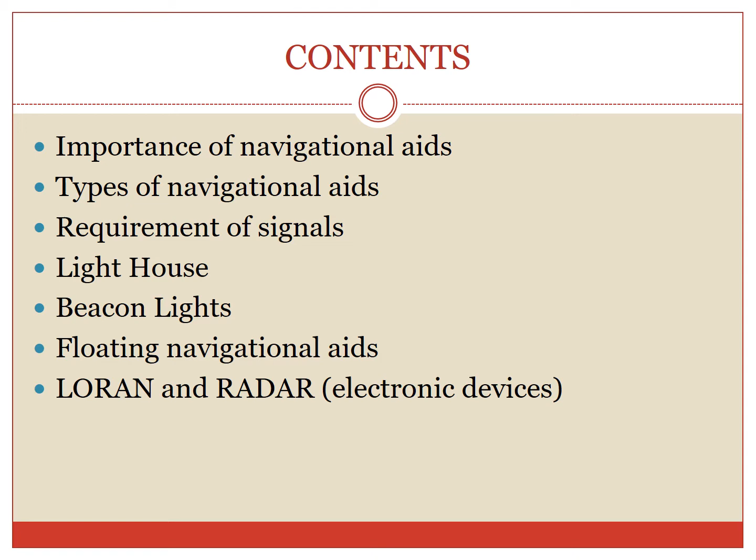So moving across to the importance of the navigational aids. For safe, efficient, economic and comfortable travel of vessels in rivers, channels, harbors and along lake and ocean shores, navigation aids are necessary. Similar to the facilities provided in airports for safe landing and takeoff, in ship traffic also certain aids are very necessary. These are called navigation aids. They are provided in the rivers, entrance channels, harbors and also along the lakes and the seashores.

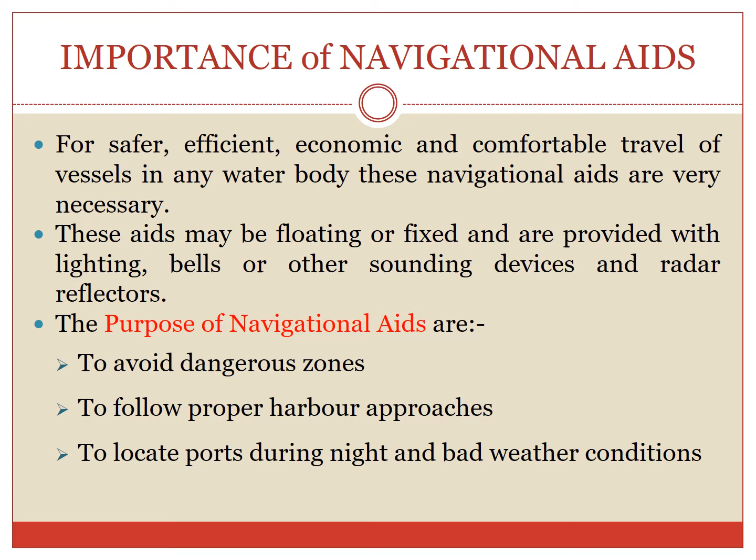These navigation aids may be of the fixed type or the floating type and provided with lighting, bells or other sounding devices and radar reflectors. There are many purposes of these navigational aids. Some are listed below. To avoid dangerous zones like rocky outcrops and sandbars. To follow proper harbor approaches. And to locate the ports, especially during night and bad weather conditions resulting in poor visibility due to fog or clouds. So my dear friends, navigational aids are truly very important to every ship.

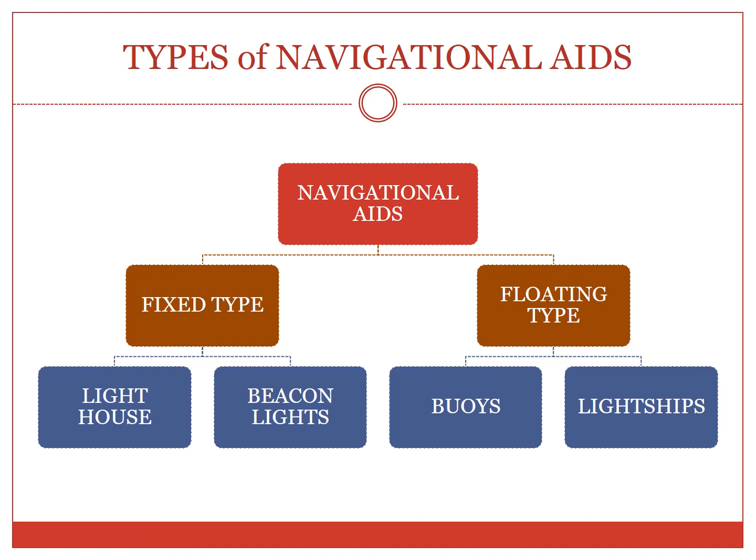Next we come to the types of navigational aids. The types are the fixed type and the floating type. In the fixed type we have two, the lighthouse and the beacon lights, and in the floating type we have the buoys and the lightships.

Every lighthouse or every navigational aid of the fixed type comes with signals. Now, what are the basic requirements of signals? The basic requirements of signals are that they compel attention. They permit time for easy response. They make their meaning clear at a glance. They command respect. And lastly, the visible distance, their visibility.

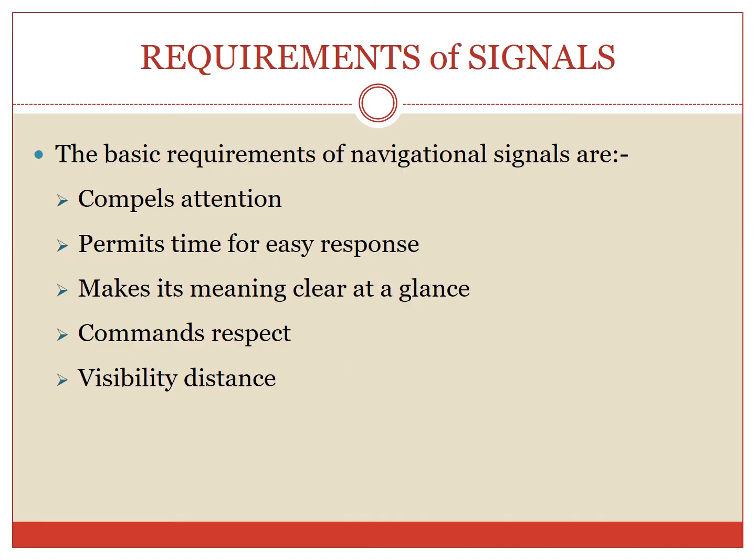Now, lighthouses. These are tall tower structures built of masonry or reinforced concrete. A marine beacon light lantern is provided on the top of this tower. A tower is divided into a number of floors. The lower floors are used as the service, stores and living rooms for the maintenance and working of the lighthouse. The towers are erected on points along the shore to guide the vessels to a nearby port. These lighthouses are also constructed on reefs, shoals or other points of danger to vessels.

The tower floors are accessible by a flight of winding stairs from bottom to top. The tower should be strong enough to withstand heavy wave action. The foundation for the tower depends upon the characteristics of the soil of that area. Generally, a thick bed of concrete is provided on hard soil and rocky beds. In the case of marshy locations, pile foundations or caissons may be used. The basement for the tower is made up of stone or concrete blocks. These stones and concrete blocks are joggled both vertically and horizontally. This secures and binds the blocks together.

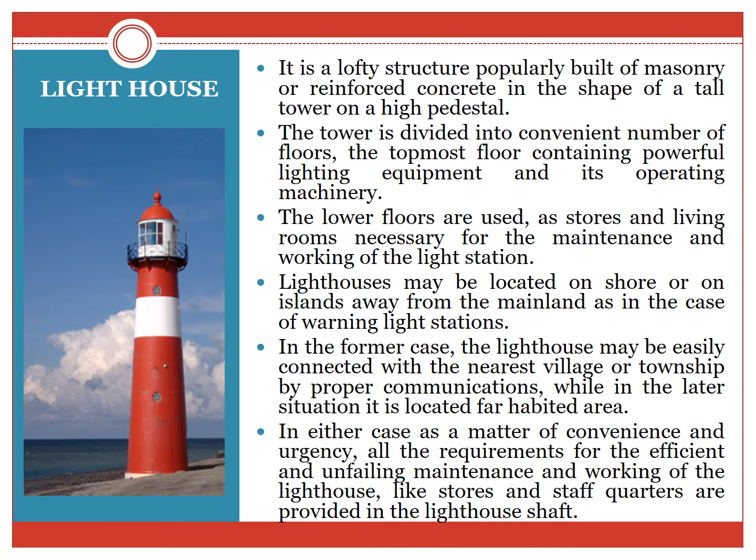The lighthouse tower must be high enough to account for the earth's curvature, so that the beacon light may be sighted by approaching ships at a considerable distance offshore. Usually, it must attain a visibility of at least 30 kilometers from the lighthouse. Also, the lights should not be located so high as to be obscured by clouds, mists, and many other things. In either case, as a matter of convenience and urgency, all the requirements for the efficient and unfailing maintenance and working of the lighthouse, like stores and staff quarters, are also provided in the lighthouse shaft.

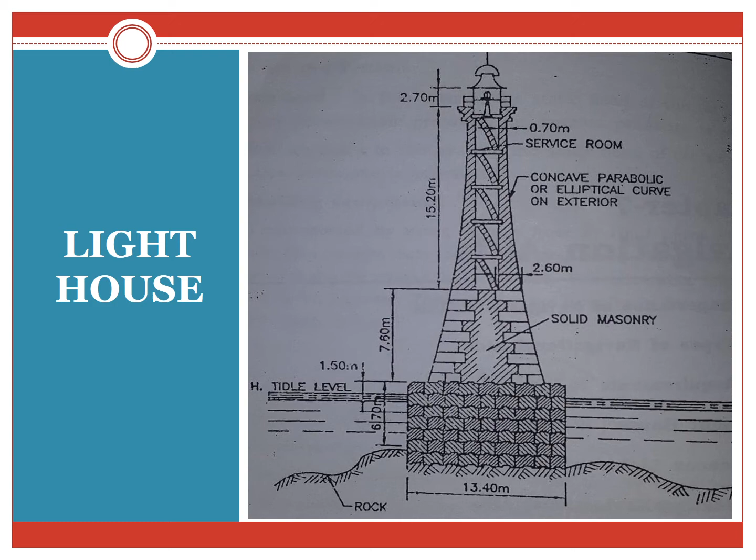So, my dear friends, this is a typical diagram of a lighthouse. See how the bed of the lighthouse is made up of concrete blocks. The masonry above is solid masonry, and the uppermost part may be of steel structure or of concrete work. The bottommost part is the foundation. The uppermost part is known as the service room, where the light is provided.

Now moving across to the beacon lights. These are fixed or flashing for easy identification by the navigator. They are used as a means of alignment or indicating changes of direction. Prominent objects or landmarks, natural topographical features or structures are used as beacons.

Alternatively, a beacon could be built in a form of an open tapering framework with a wide stable base and gradually narrowed to the top, like a triangle or a circle. The distinctive geometrical figure is suitably painted so as to cause the prominence.

The illumination is both refracted through the powerful lenses and prisms and reflected by highly polished parabolic concave mirrors. Now, the fixed lights should be avoided to get rid of confusion caused by the neighborhood private lights. Depending upon the focal distance of the lens, the lights are classified as the first order lights, the second order lights, and miscellaneous smaller lights.

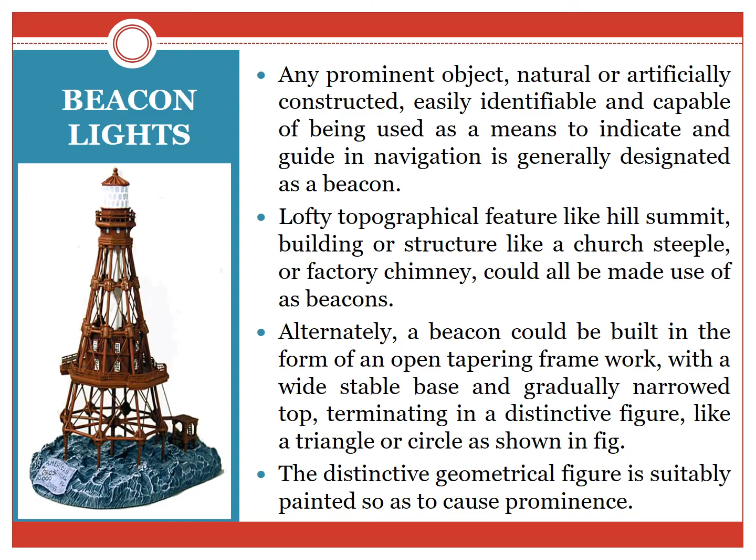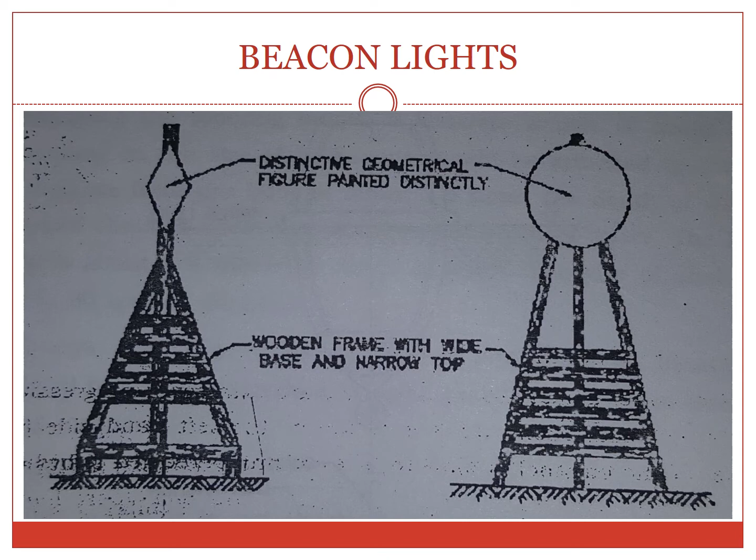Thus, alternatively, a beacon can be built in a form of an open tapering framework. The distinctive geometrical figure is suitably painted so as to cause the prominence. So, these are the two types of beacons where the base is wider and at the top it is like a triangle or a circle. These are the distinctive figures painted distinctively.

Moving across to the floating navigational aids, first we move across to the buoys. What are buoys? These are small sized floating structures generally in a form of large cylindrical cans and drums. They are provided with through stays. They are employed for demarcations at entrances, approach channel boundaries, and so on. Two rows of buoys, one along each boundary of the approach channel, indicate its width.

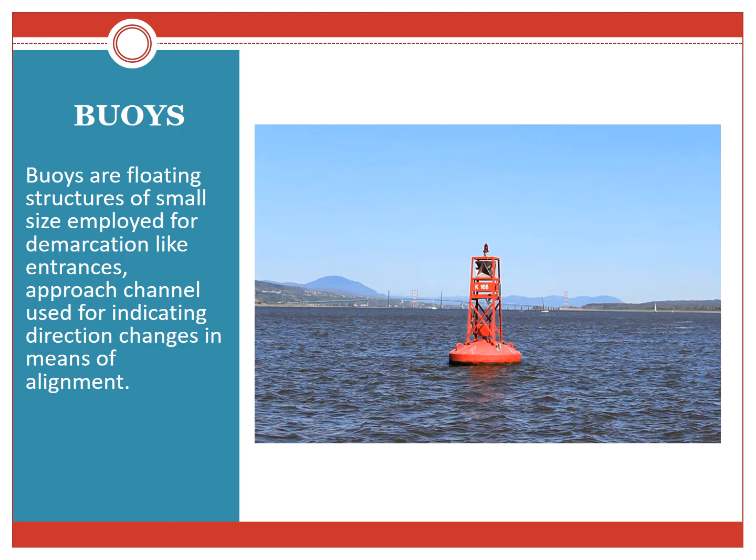Buoys are of different types: channel and entrance demarcation buoys, luminous buoys, audible buoys or bell buoys, and mooring buoys. So these are the four types. What are luminous buoys? These are the signals that are to be provided at places likely to be seriously affected by fogs. During the night, the buoys are to be lighted. For lighting the buoys, oil gas or acetylene are used. The fuel is stored in the buoy itself.

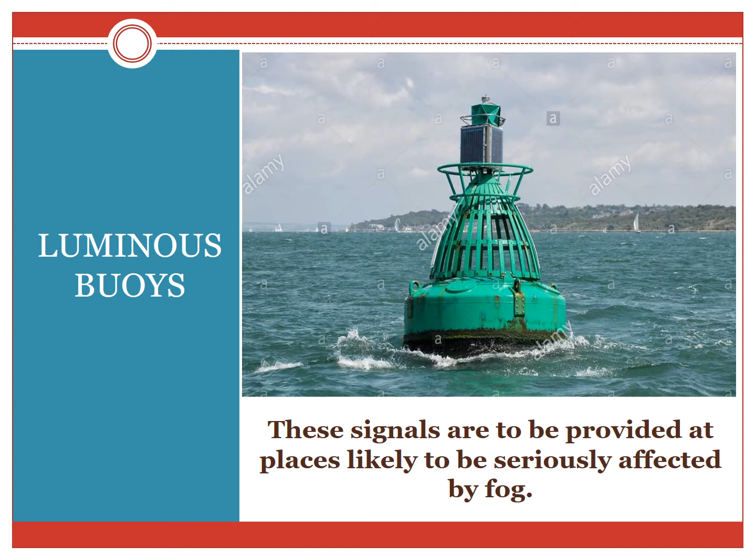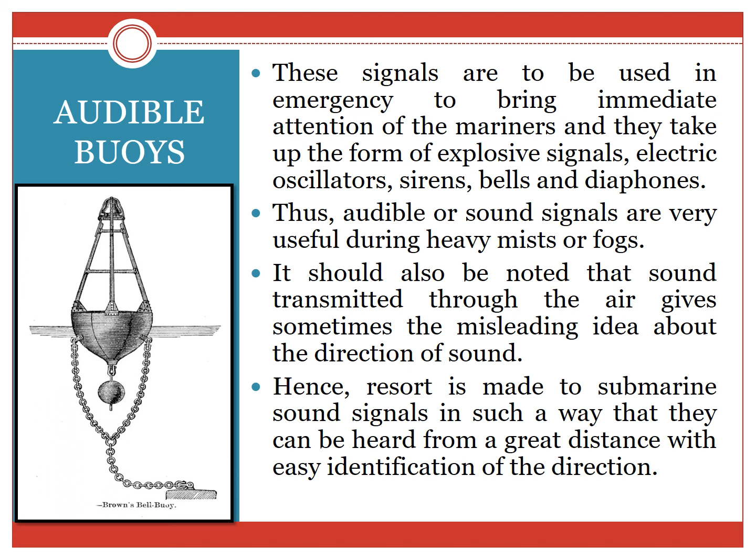Next we move across to the audible buoys. For indicating foggy weather, audible buoys or bell buoys are used. Bells are mounted on these buoys which will be sounded in quick successions at intervals of not more than a minute. In these buoys, an automatic arrangement is made for a hammer to strike against the rim of the bell fixed in this particular buoy.

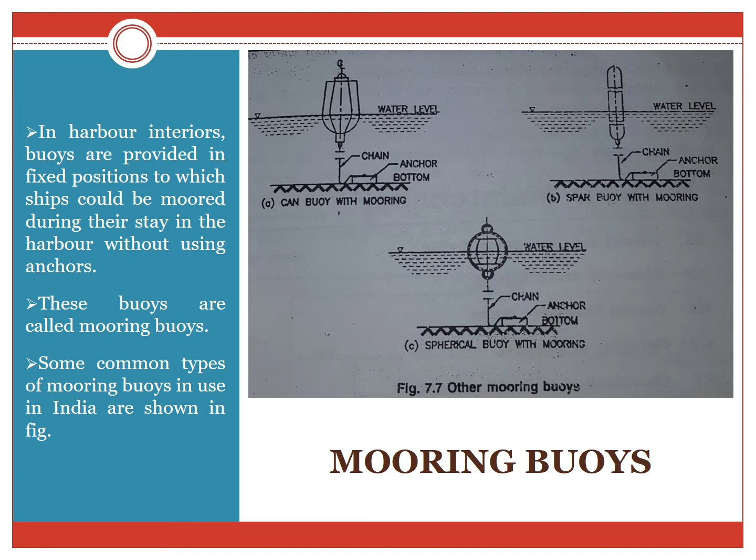Next, the mooring buoys. There are three types of these buoys: can buoys with mooring, spar buoys with mooring, and spherical buoys with mooring. So in harbor interiors, buoys are provided in fixed positions to which ships could be moored during their stay in the harbor without using anchors. These buoys are known as mooring buoys. Some of the common types, as we have already discussed, can be these three.

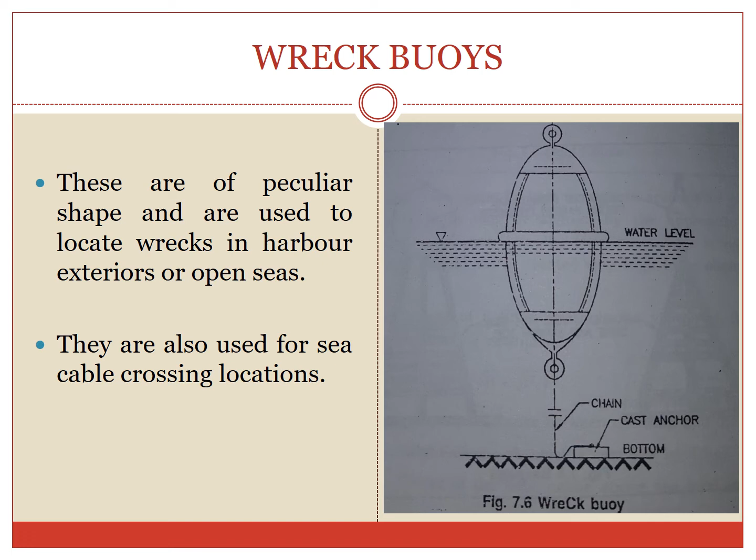Next and the last buoy is the wreck buoy. Now what are wreck buoys? These are of peculiar shape and are used to locate the wrecks in the harbor exterior or open seas. They are also used for sea cable crossing locations. See the figure of the wreck buoy; it shows that it has a bottom, the cast anchor, the chain and the buoy itself above the water level and below the water surface.

Lightships. Now in locations where it is not practical to build a lighthouse, small ships displacing about 500 tons are used for this purpose. These lightships vary in size. They can be fully manned or unmanned ones with automatic lights and fog signals. Now the lantern is generally situated at about 9 to 12 meter height above the water level. The light apparatus comprises 4 pairs of mirror reflectors placed around the light and made to revolve at a suitable speed, emitting a predetermined number of flashes.

Now the hulls of the lightships are generally painted red in color. The name of the station is painted in white on both the sides of the lightships. The lightship propulsion is either steam powered or diesel. So the light apparatus consists of the 4 pairs of mirror reflectors and they are made to revolve at a suitable speed, emitting a predetermined number of flashes. These are, my friends, the lightships.

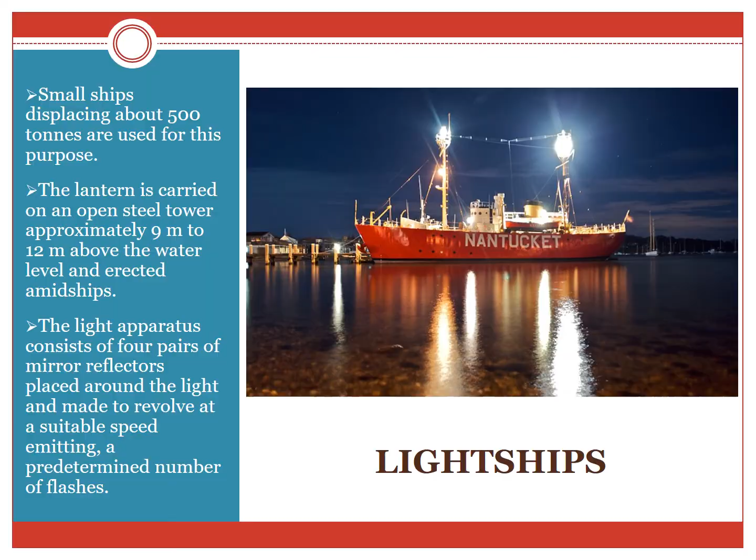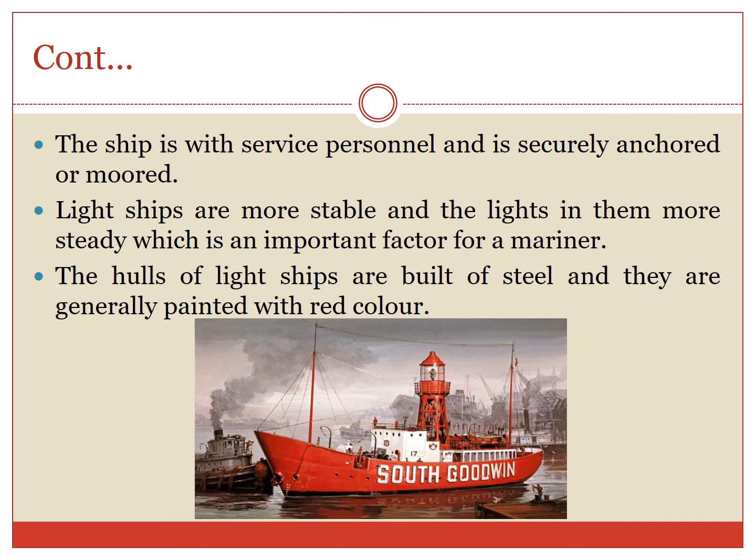These ships are in service with personnel and are securely anchored or moored. Lightships are more stable and the lights in them are more steady, an important factor for a mariner. The hulls of the ships are built up of steel and they are generally painted with red color.

Moving across to the electronic devices, these are the LORANs and the radars. Now what is LORAN? The full form stands for Long Range Aid to Navigation. Now LORAN helps to fix the location of a ship from the LORAN lines, which are graphically represented on the charts. So these enable a ship to fix its position with respect to fixed marks.

Next is radar. Radar stands for radio detection and ranging. Radar is used to identify any objects including ships and buoys and to measure the range, altitude, direction or the speed of both moving and fixed objects. These radars can also be used in clear visibility for navigation or collision avoidance purposes by detecting the objects or the targets above the water level. These are also called radio locations.

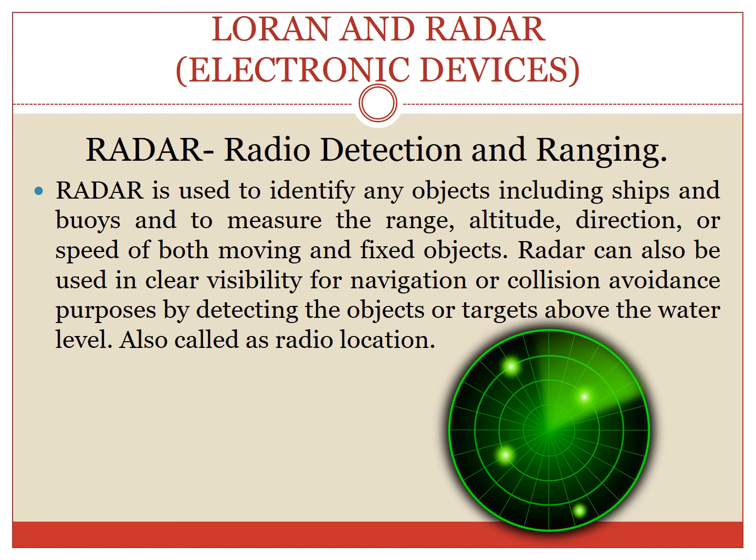So these are the 2 electronic devices in the modern days that we as mariners can use for detection purposes.